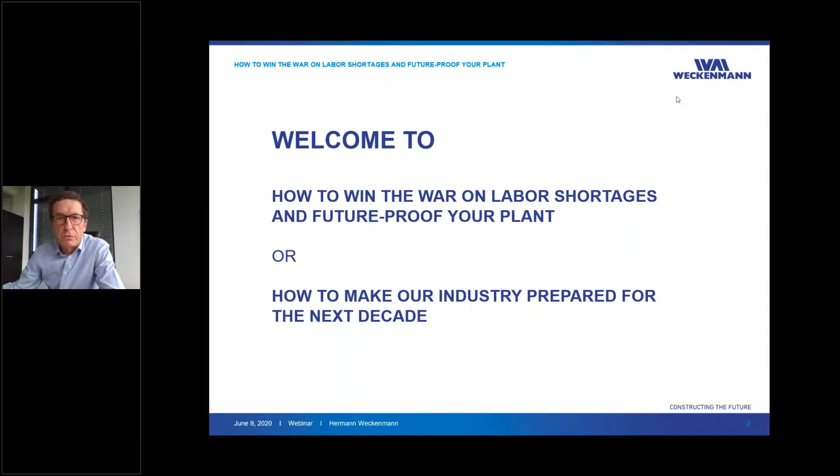Welcome to everybody to today's topic, how to win the war on labor shortages and future-proof your plant, or how to make our industry prepared for the next decade.

In this webinar, we will discuss the following topics: who is Weckenmann, today's challenges, the manufacturing labor shortage is still coming, two US precasters made the leap, stationary production, circulation line, outlook, and discussion.

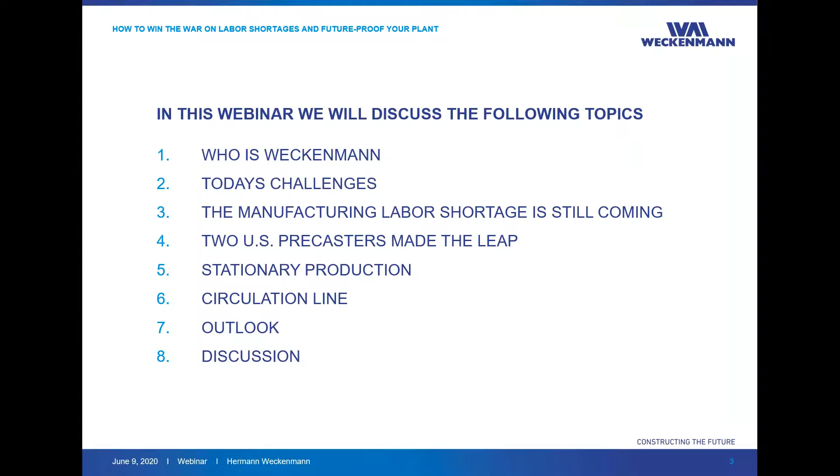Who is Weckenmann? First, some information about our company. Founded in 1957, we have about 150 employees. Our customers are worldwide. Our location is in the southwest of Germany, near Stuttgart, or for those who know that, the Black Forest. We are an international technology leader. We made some inventions, for example, the shuttering robot or concrete spreader, the automatic concrete spreader is invented by us.

We are thinking and acting globally, so we do have a lot of international customers, and the key to our success is a combination of high product quality and a focus on each country's specific requirements. Our machines and equipment is really long lasting, 20 years and more are they in use. And we have a high manufacturing standard in 2 production plants. To bring it in one sentence, Weckenmann is 100% dedicated to the precast concrete industry.

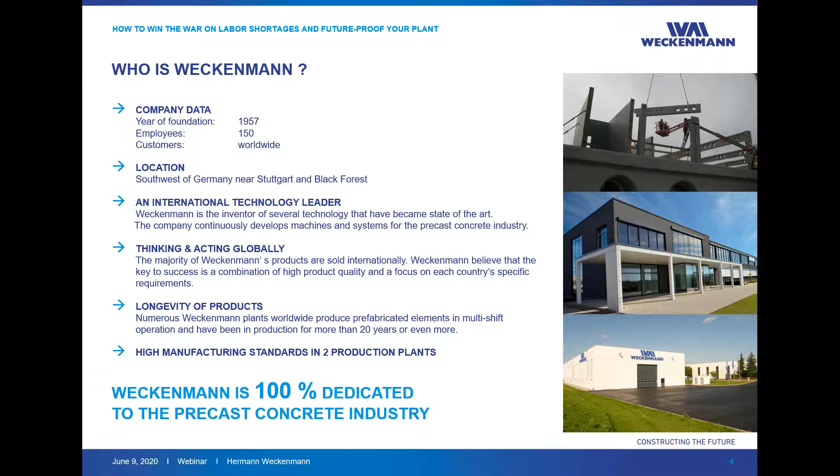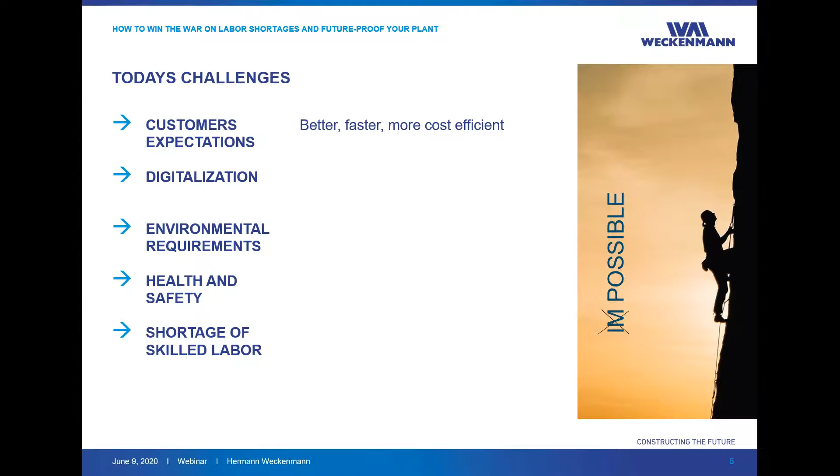Today's challenges. First, the customer expectations: better, faster, more cost efficient. We have to be better, faster, and more cost efficient to gain more market share. Digitalization is an advantage and a precondition for industrialized construction, and that's the future.

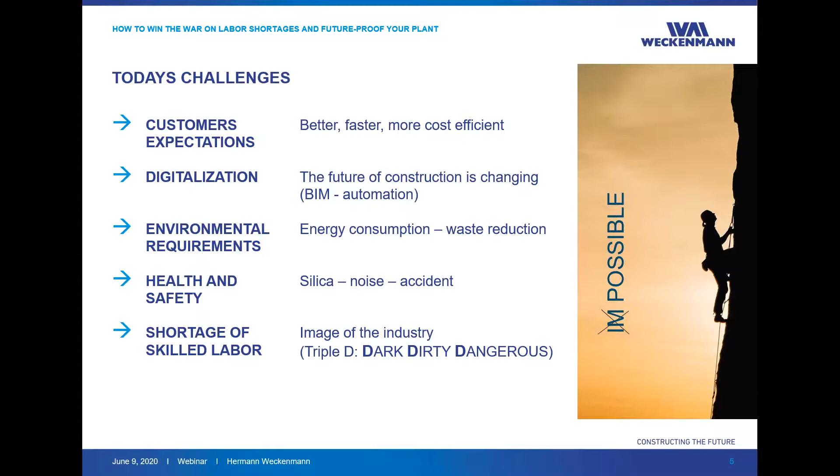The environmental requirements, energy consumption, waste reduction are some headlines. The reduction of the carbon dioxide footprint will be an important competitive advantage in the future for our industry. Health and safety, to keep our employees healthy and safe should be out of discussion. And the shortage of skilled labor, we have to overcome the not-the-best image of the industry. I heard once the description of a triple D: dark, dirty, and dangerous. The precast concrete industry has a big chance to make their jobs much more attractive, well paid, modern, and safe.

The manufacturing labor shortage is still coming. Stay prepared. Estimates put the manufacturing labor shortage at 2.4 million by 2028, according to Deloitte. We can't assume this gap will be solved by a sudden influx of employees after COVID-19 restrictions are eased. The number of retirees continues to increase as the working population ages, meaning there will still be a lack of sufficient qualified applicants to replace them. That's something we have to discuss today.

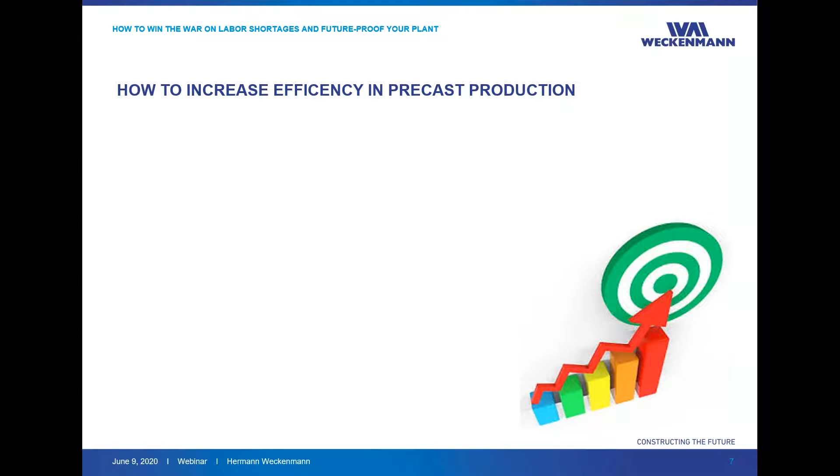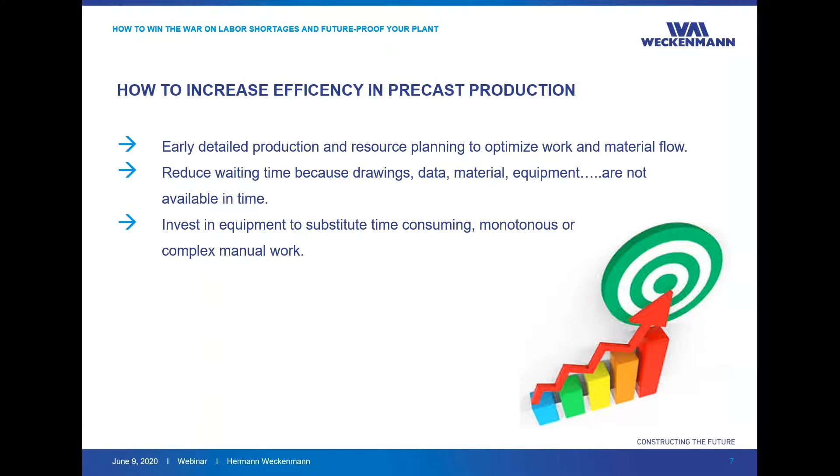How to increase efficiency in the precast concrete industry or in precast production. Early detailed production and resource planning to optimize work and material flow. Then we have reduced waiting time because drawings, data, material, equipment are not available in time, and this is a huge possibility really to improve the efficiency. And there's a chance to invest in equipment to substitute time-consuming, monotonous, or complex manual work.

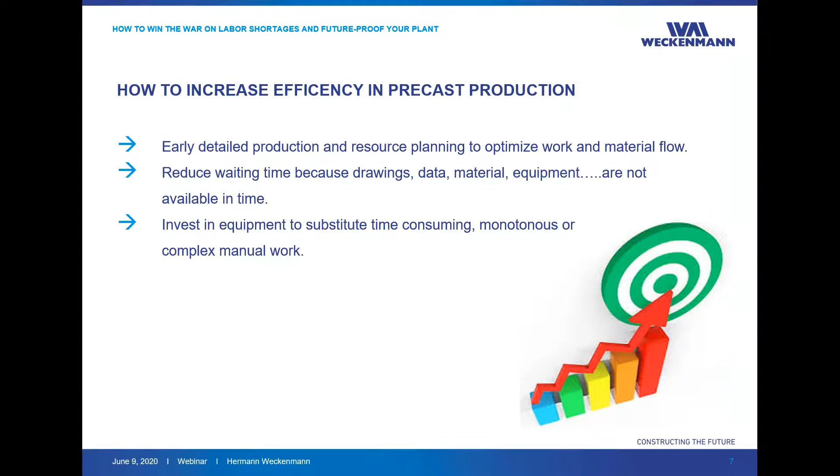Where are the greatest potentials to reduce manpower in precast production? First, we have the formwork.

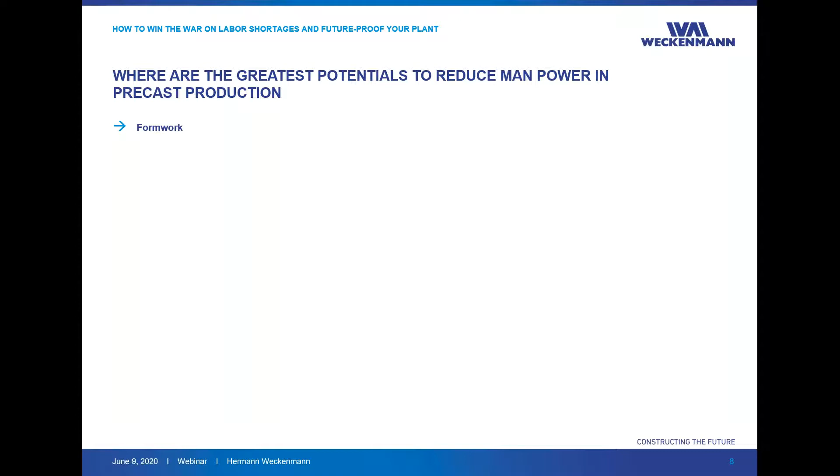Magnetic side rail, blockouts, and other standardized formwork helps a lot. Or do you still use a lot of wood and polystyrene to set up side rails and other formwork? Is the measuring tape your current technology? There are plotters, laser projection systems, and shuttering robots available to do that.

Cleaning and oiling the forms. Is a scraper or broom or compressed air your tool to clean the molds? Cleaning and oiling machines can really help to improve productivity.

Reinforcing. Rebar straightening machines, wire mesh welding plants, or rebar placing robots can help to reduce the manpower. Everybody can imagine how much time it needs to reinforce with rebars and standard wire mesh, not to mention the waste.

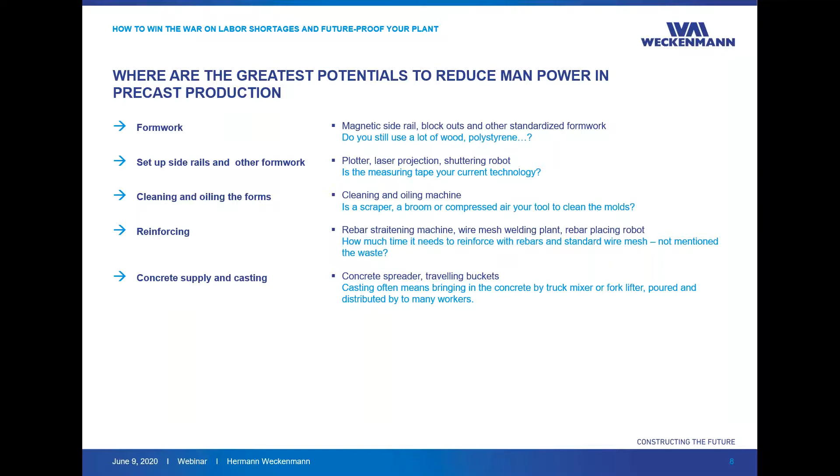Concrete supply and casting. There are concrete spreaders available or traveling buckets. And when we see what is in many factories, the normal way to bring in concrete is by truck mixer or forklifter, then poured and distributed by too many workers shoveling and bringing the concrete to the right place.

We have the surface treatment. Power troweling machines are available, or automatic washing machines and something like that. It's more safe to use such a machine, and it's faster and more productive than standing on the bed using a mobile troweling machine, which is really time consuming and dangerous.

Service and maintenance helps reduce manpower. Although you need manpower to do service and maintenance, if the machine has a simple and robust design, or remote access to the control system, or when you use predictive maintenance, the availability of the equipment gets really increased.

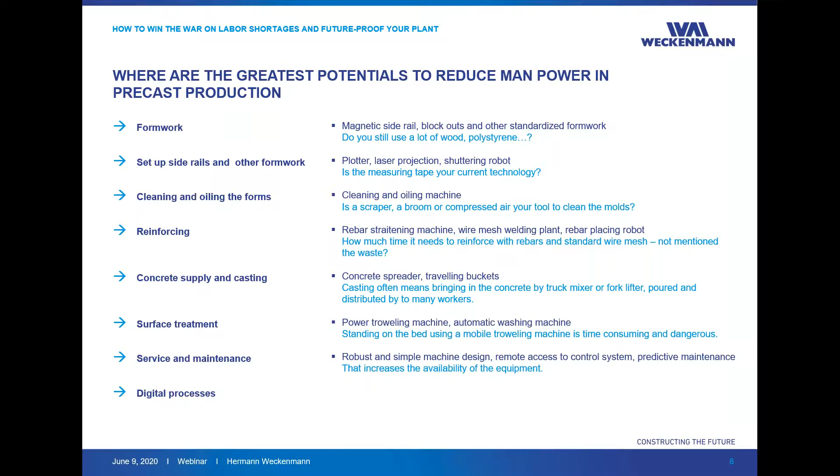And we have the digital processes. Hardware and software are available to digitalize all processes from design, procurement, manufacturing, transport to installation. And we should not see anymore, or that often, people running around with a bunch of papers, because that isn't really future proof.

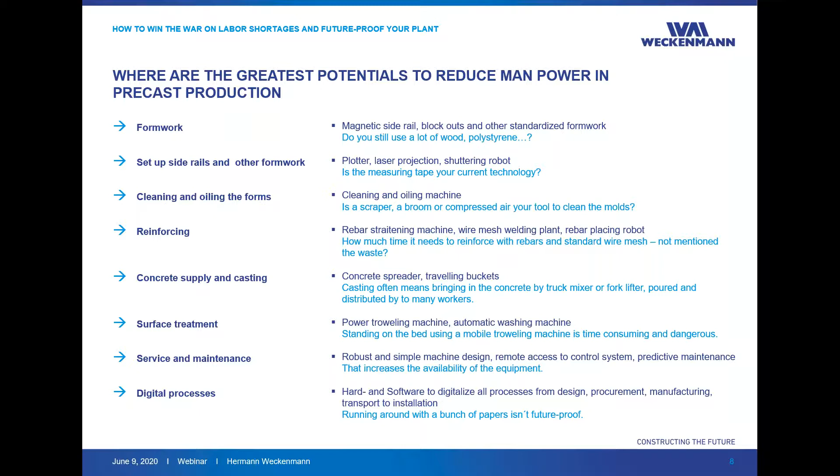Which production method is really the right way? Is it stationary production or is it circulation line? Is stationary production old style, or is the circulation technology the future? Let's talk about differences and advantages of those two systems.

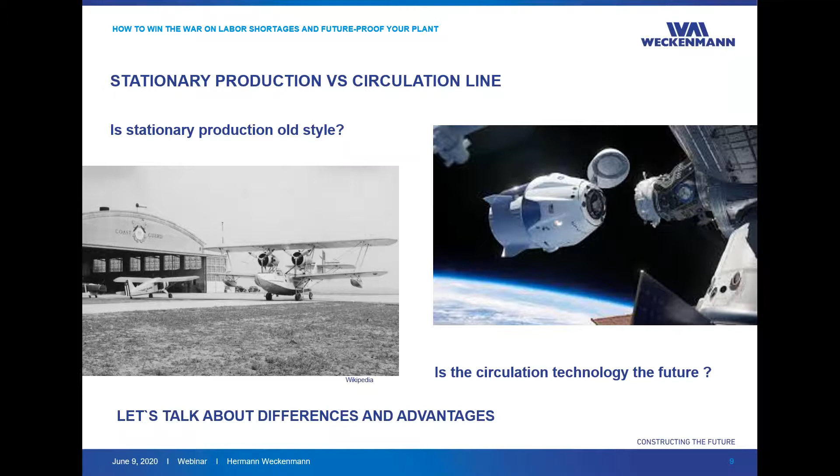First, we have the circulation line. The advantages are the following. First of all, the work comes to the worker. That means everybody stays at a certain station, less running around. You have dedicated working places. There are high automation opportunities.

Those circulation lines can really start with basic technology or basic equipment, but it's easy to upgrade, easier to upgrade than in a stationary line. We have good workplace conditions. For example, temperature and light can be controlled. Health and safety are more guaranteed, and material and tools are within reach.

We have targeted material flow. The way in and out for all material is clear. We have dedicated storage areas. It's energy efficient. For example, think about the curing chamber, which is an insulated environment where you have controlled temperature and humidity.

The circulation system allows better production control. For example, data about material consumption, working time, curing time, status of each job is available on time. And it is less space consuming, because in the curing chamber, the circulation technology uses the third dimension, as the pallets are stored one above the other.

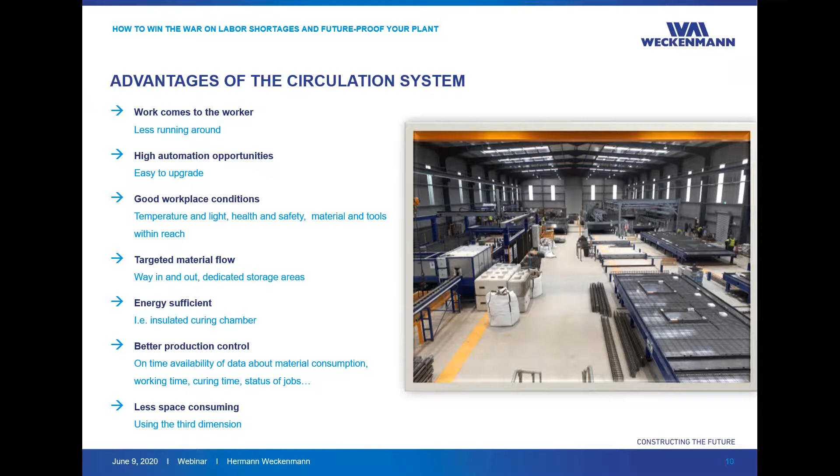Coming to the advantages of a stationary production line: long beds are more suitable for pre-stressed products. The flexibility for different products to be manufactured is higher, because several teams can work on different molds simultaneously. The investment is lower, which makes sense when the required capacity is smaller, because the circulation line needs a minimum production output per day to be cost efficient.

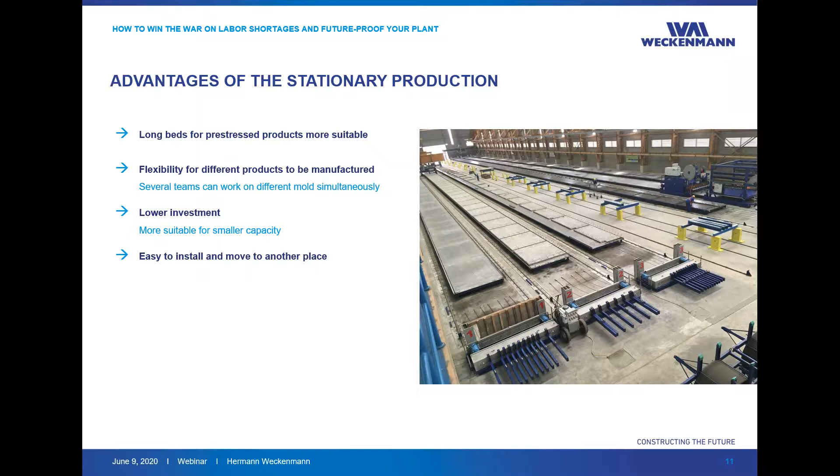And it is easy to install and easy to move to another place, just in case that's needed.

Why did two US precasters make the leap into higher investment in modernization, in automation? I will present two technologies: one is a stationary line and one is a circulation line. They made the leap because they want to be ahead in quality and productivity.

We started with a company, Kerkstra Precast in Trenton. They have a stationary production of double T's and architectural wall panels. Kerkstra was founded in 1962. They operate two factories, one in Grand Rapids, Michigan, and one in Trenton near Detroit, Michigan. Their product range goes from hollow core slabs, columns, beams, double T's to wall panels.

In their stationary production, at the plant in Trenton, they produce prestressed solid and insulated architectural wall panels and double T's. They have a double T bed 500 feet long, and 3 flat slab beds, 15 feet 4 inches wide.

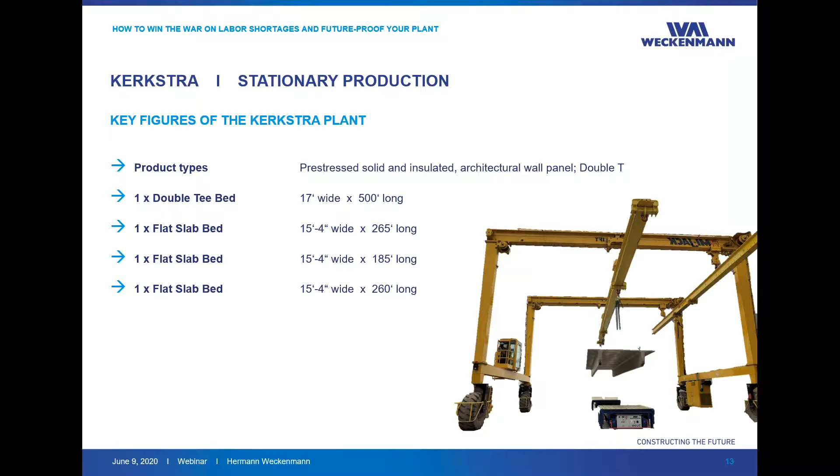Their stationary production investment was made in 2018 and 2019. They invested in a set of machines, in particular a so-called CPO machine, a finishing machine, a utility cart, top cart, and a runoff cart. I would like to show you these machines in action.

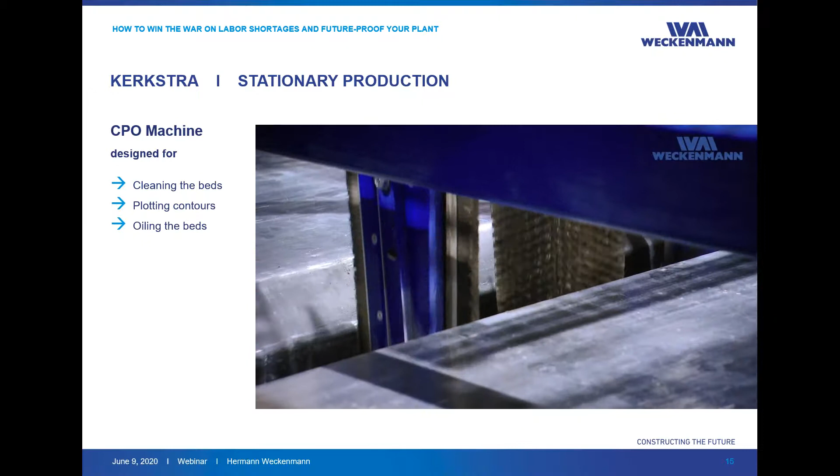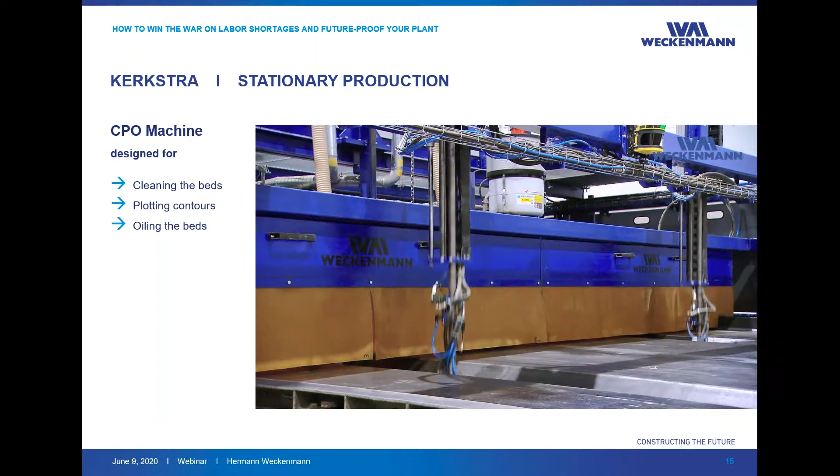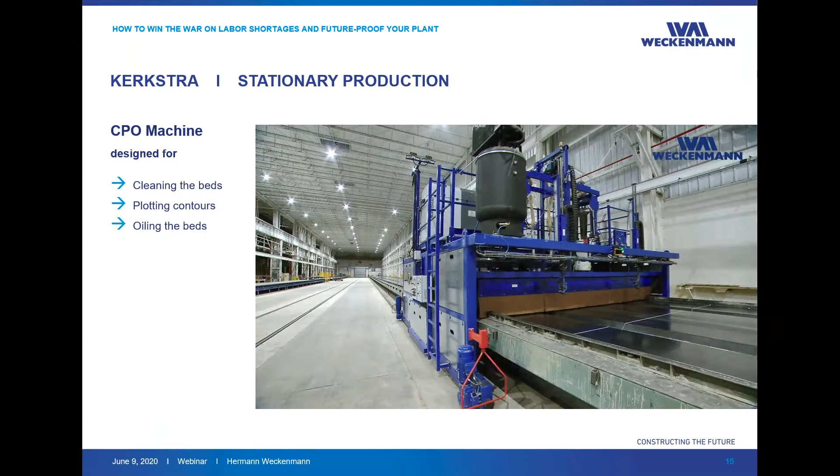First, start with the CPO machine. CPO stands for cleaning the beds, plotting the contours, and oiling the beds. That machine runs over the bed back and forth and executes all those processes automatically. Only the operator has to push a button at the beginning, and everything else happens fully automated. You can see very visible plotting lines showing where to place the bulkheads later on.

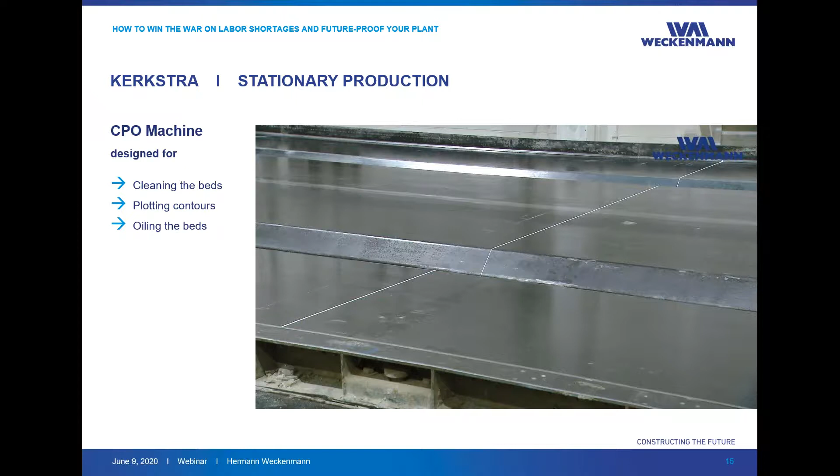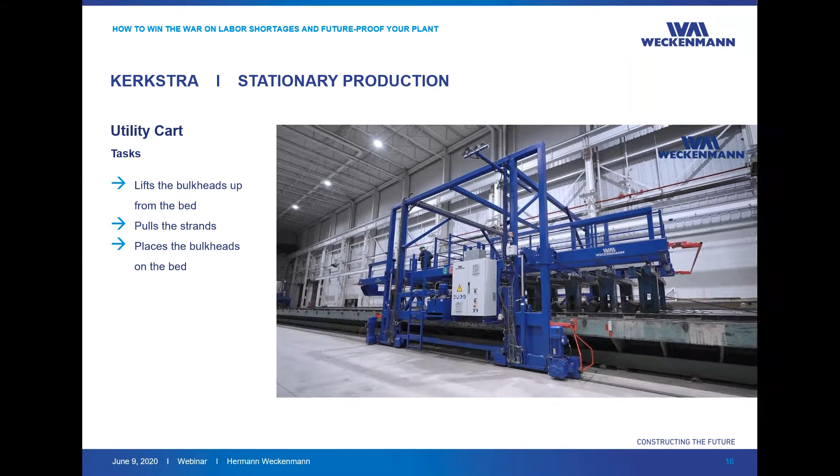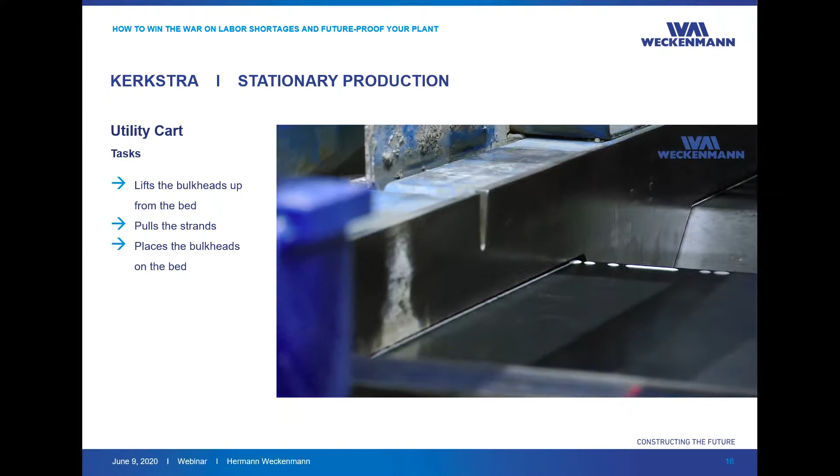Then we have the utility cart. Its task is to lift the bulkheads up from the bed after stripping the double T's, pull the strands, and place the bulkheads on the bed. It's operated by one operator who stands on the machine and travels with it all along the bed. The bulkheads are set up by the machine along the plotting line, so very precisely.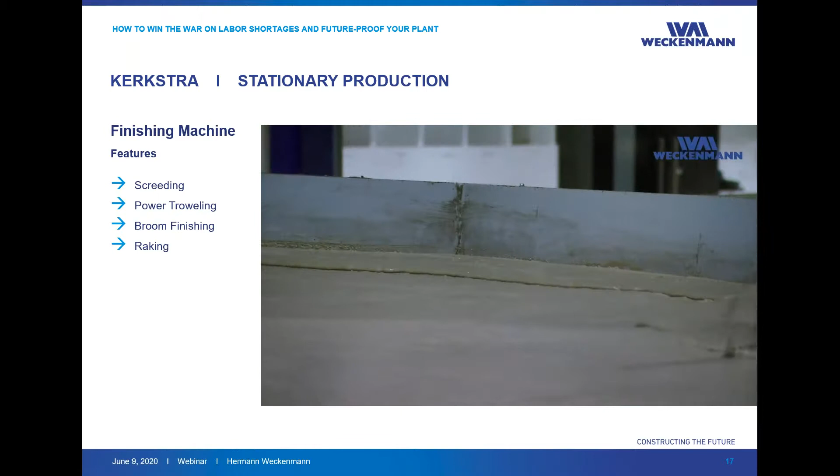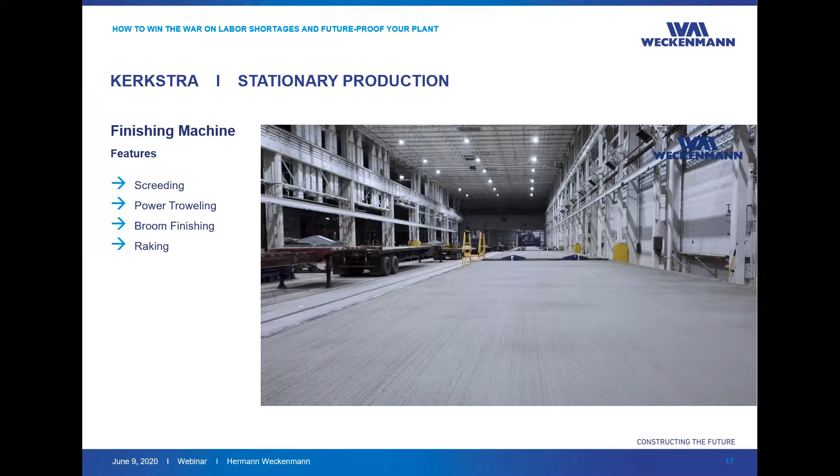Then we have the finishing machine. After casting the concrete, the finishing machine screeds the surface. It can do brooming, finishing, raking, and power troweling, depending on the requirement for the surface on the double T's.

Then we have the tarp cart. Two racks for the hoops are integrated, which allows quick and easy removing and installation of the hoops and the tarp.

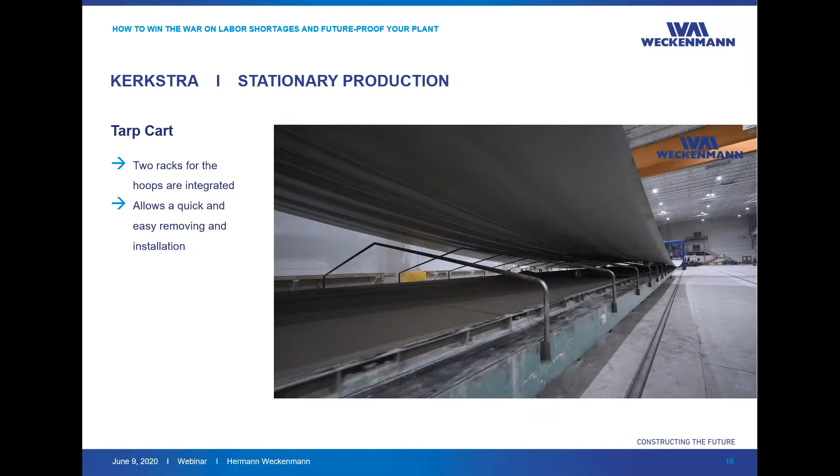The machine can move from one bed to the next, from the double T bed to the flat slab bed, by itself without a crane, just using rails on the floor.

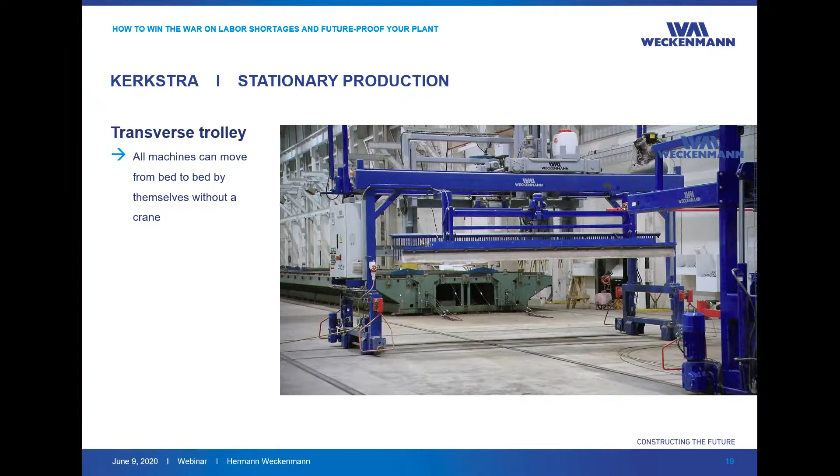Then we have the runoff cart for the transport of double T slabs or wall panels, using two identical carts which run on the same rail track. The carts are battery powered, and one operator controls the machines with a radio remote control system.

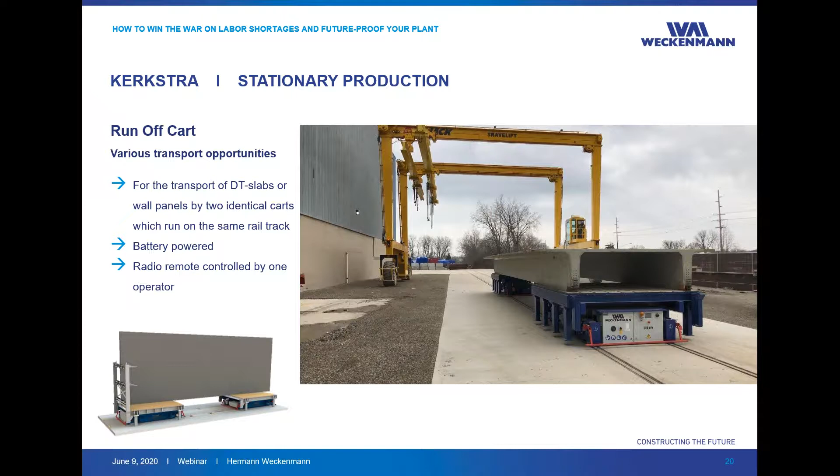What are the achievements after this investment by Kerkstra? We have increased productivity. Plotting, cleaning, and oiling are fully automatic, taking approximately 1 hour for a 500-foot-long bed. Strand pulling and setting up bulkheads needs 1 worker and also takes about 1 hour. Screeding and brooming needs 1 worker in less than 1 hour.

It depends on the surface type. Power troweling, of course, needs more time, but in general this is still a very short time to do, and just with one worker.

We have less silica in the air because the brushes and vacuum system integrated in the CPO machine reduce the dust. We also have reduced consumption of forming oil. The quantity of forming oil sprayed on is very even and can be adjusted exactly to the supplier's recommendation. The machine doesn't know a Monday or Friday, so it applies the oil the same amount every time, exactly what's needed and nothing more.

We have high dimensional accuracy with no measuring errors. The data is generated by the CAD system, and if that data is correct, all the plotting lines are correct as well. The plotter can plot whatever is in the file, so even numbers, figures, letters, or circles — there are no limitations.

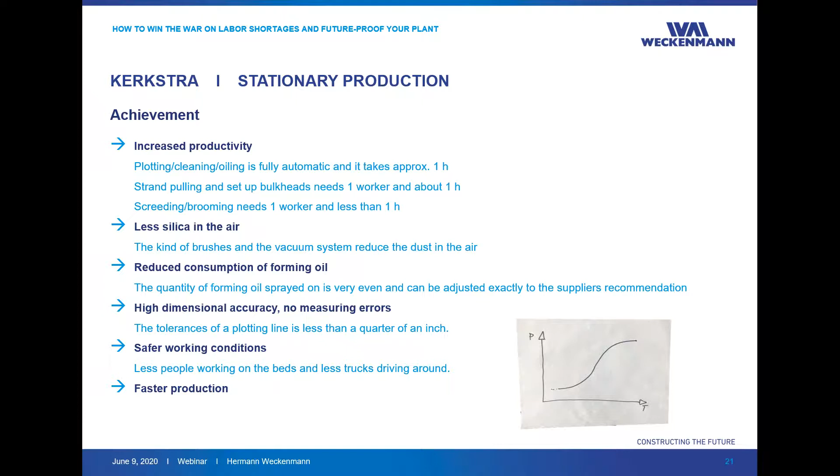We have safer working conditions because fewer people are working on the beds and fewer trucks are driving around. And overall, we have faster production.

We come to the next sample or project: Molin in Ramsey, Minnesota. They have a circulation line for architectural wall panels. Founded in 1897, Molin is a designer, manufacturer, and installer of precast pre-stressed concrete components. Headquartered in Lino Lakes, Minnesota, Molin also operates an automated wall panel production facility in Ramsey, Minnesota, which is what we're talking about now.

The product types there are solid and insulated architectural wall panels with many different surfaces or textures: fair-faced brick, water-washed, acid-etched, sandblasted, liner — almost no limitations. The pallet size is approximately 13 feet wide and 40 feet long. They have 24 pallets in their plant, and the maximum dimension of a precast concrete element is 12 by 39 by 12 inches.

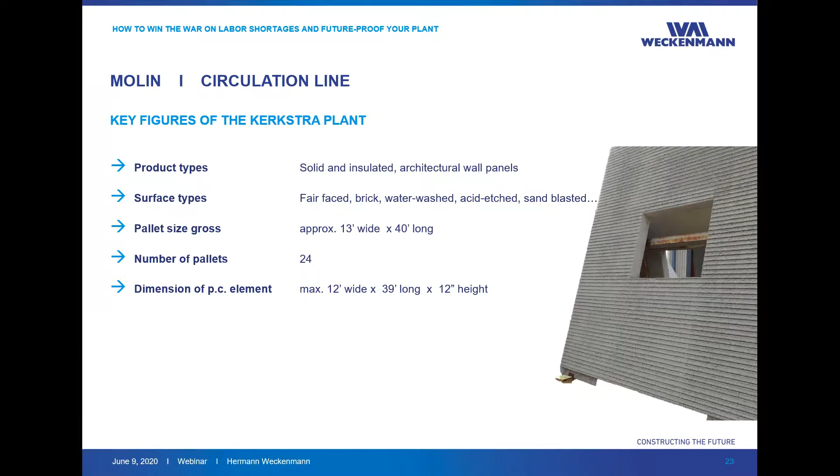In the following, the circulation line. The main components are, first, they have pallets and magnetic sidewalls, rollers and friction wheels, and cross-lifting trucks to move the pallets around in the factory, longitudinally and transversally.

And they have a heated queuing chamber, an insulated queuing chamber with an automatic rack operator. So bringing the pallets in and out of the queuing chamber is fully automatic. Also, they have a CPO machine. The functions are the same as with the Kerkstra. Then they have a sidewall cleaning and oiling line.

They have a concrete spreader with 2 interchangeable buckets for face mix and gray concrete. It's very important when they do colored concrete or different face mix, to avoid washing the bucket all the time after each batch of concrete. Then they have 2 compaction line stations. It's a shaking technology, very low noise shaking. It's a horizontal and low frequency system.

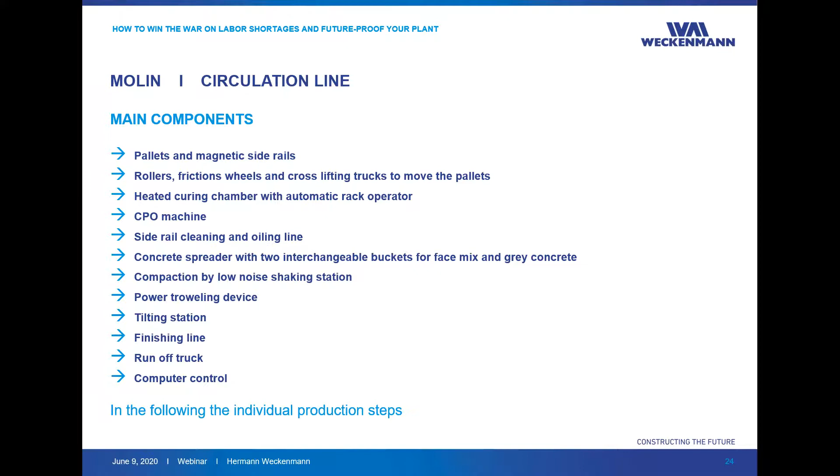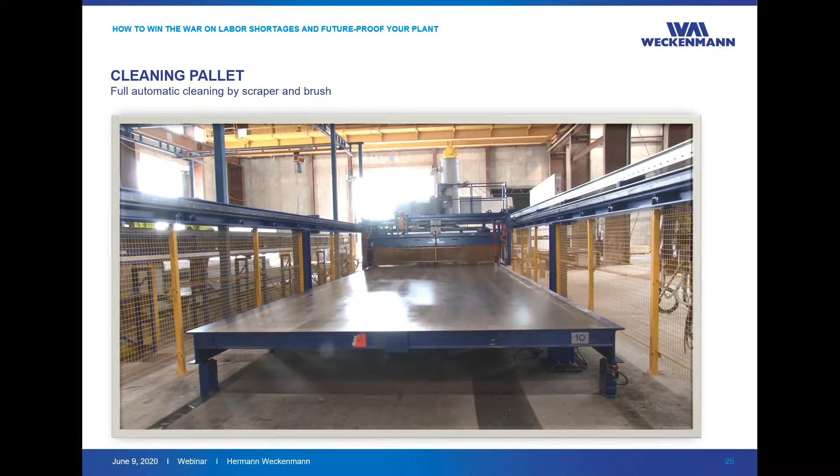Then they have a power troweling device. They have a tilting station, a finishing line, run-off truck, and everything is computer controlled. In the following, the individual production steps are also shown in videos. It starts with cleaning the pallet by the CPO machine. That machine is also fully automated. It goes over the pallet using a scraper and a brush.

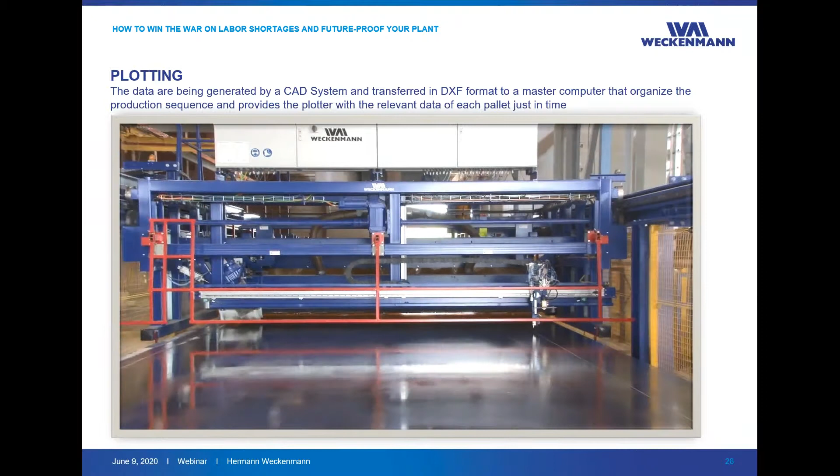Then plotting starts. The data are generated by a CAD system and transferred in DXF format to a master computer that organizes the production sequence and provides the plotter with the relevant data of each pallet, and that happens really just in time. And also here, there are no limitations on the information you want to bring onto the pallet. Then we have oiling. Forming oil is sprayed onto the pallet in a very even and consumption-controlled way.

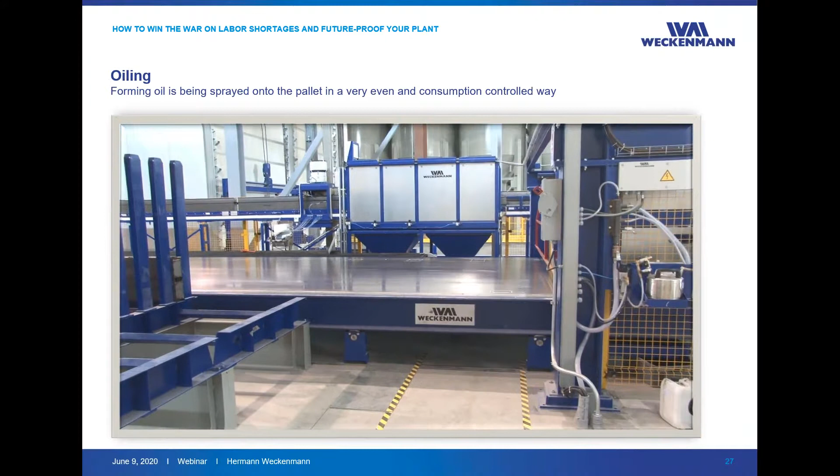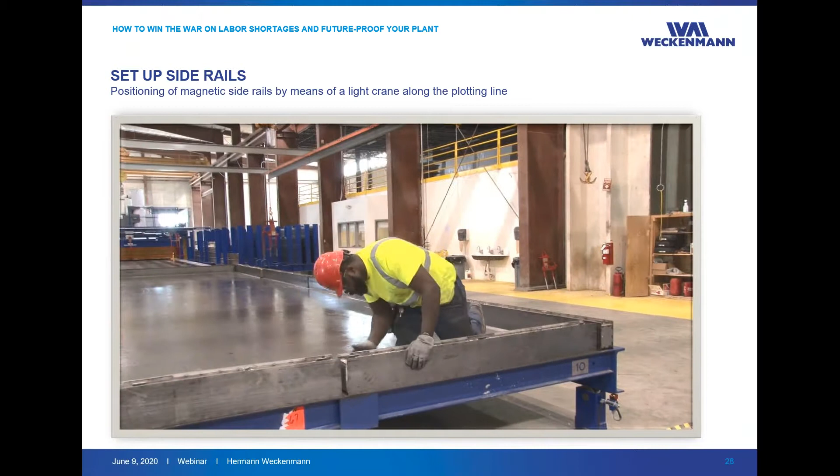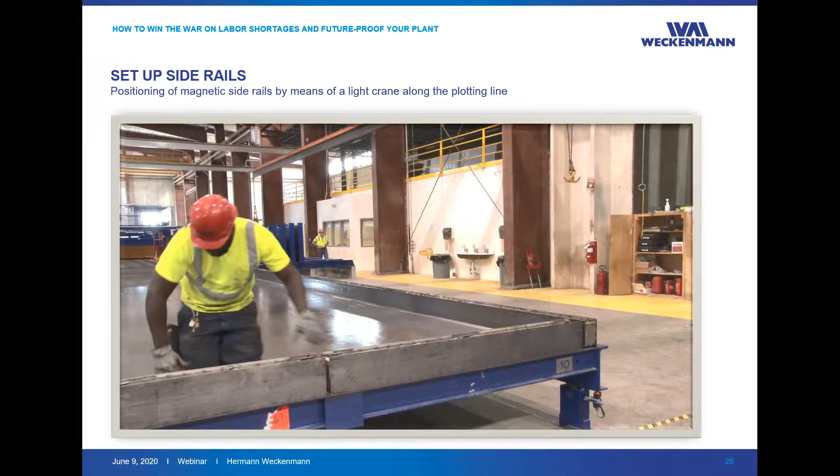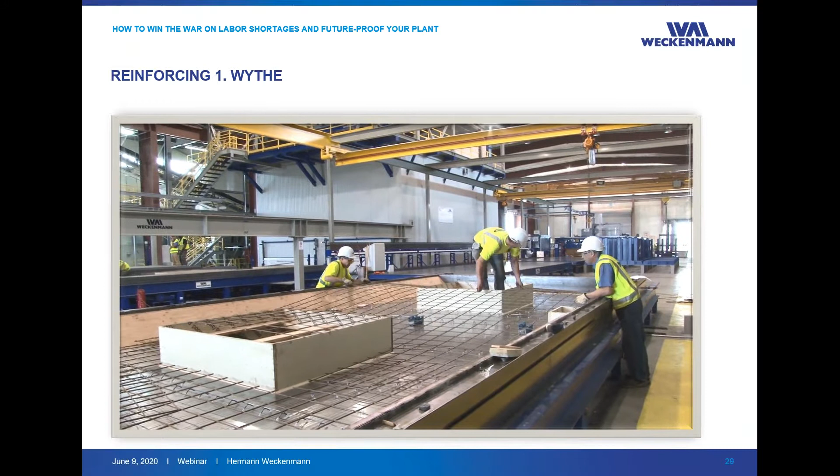Then we have the setup of the side rail. The positioning of the magnetic side rail is done by one operator by means of a very light crane, and he uses a plotting line to align or place the side rail. Then the pallet moves further to the next station where the reinforcing of the first wythe happens. And then the pallet goes into the casting station.

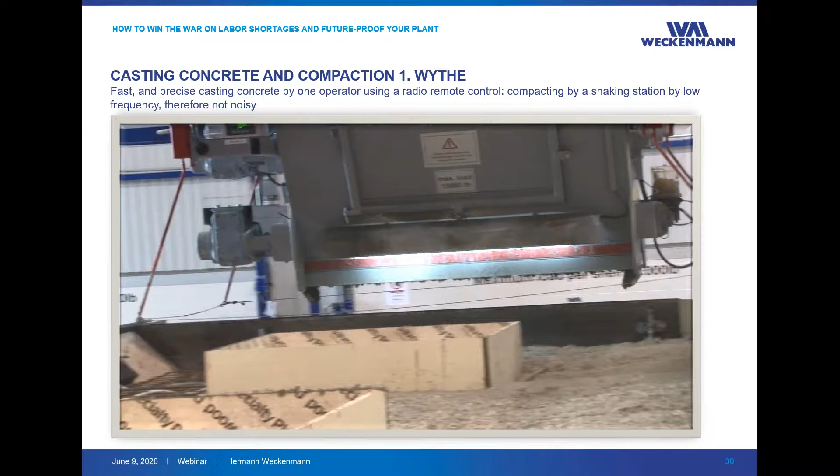So casting and compaction happen at this one station. It's fast, precise. It's done by one operator using a radio remote control. Compaction happens with a shaking station, low frequency, and therefore it's really not noisy. Very comfortable for the workers there. Then the pallet goes back to the station where the insulation is built in,

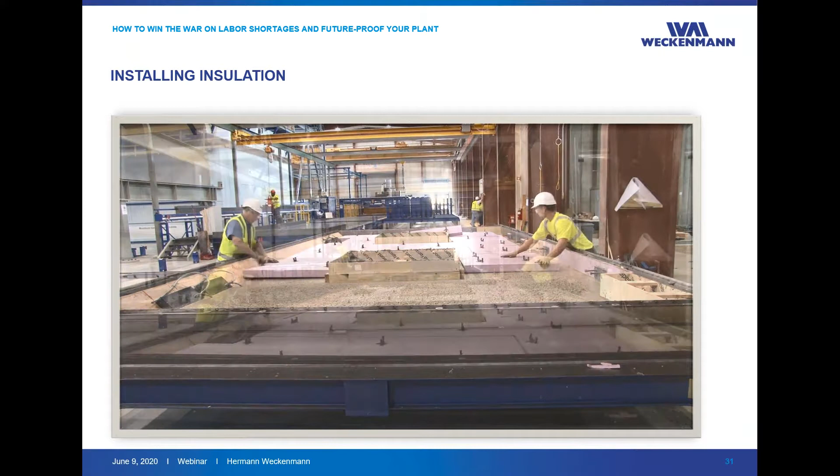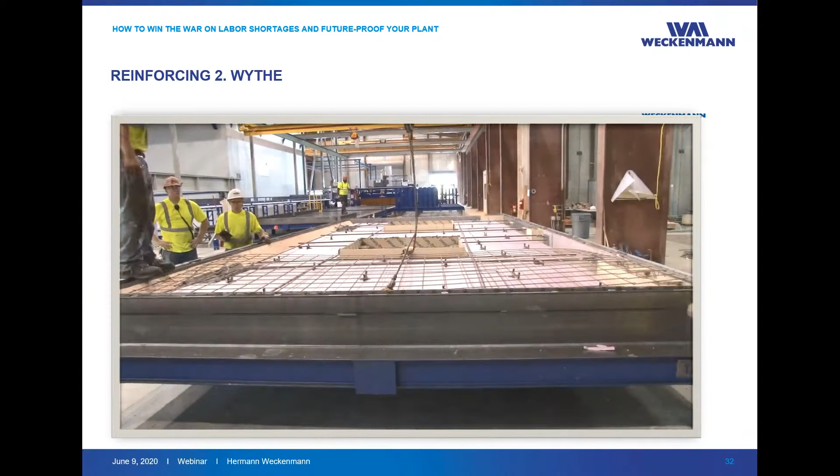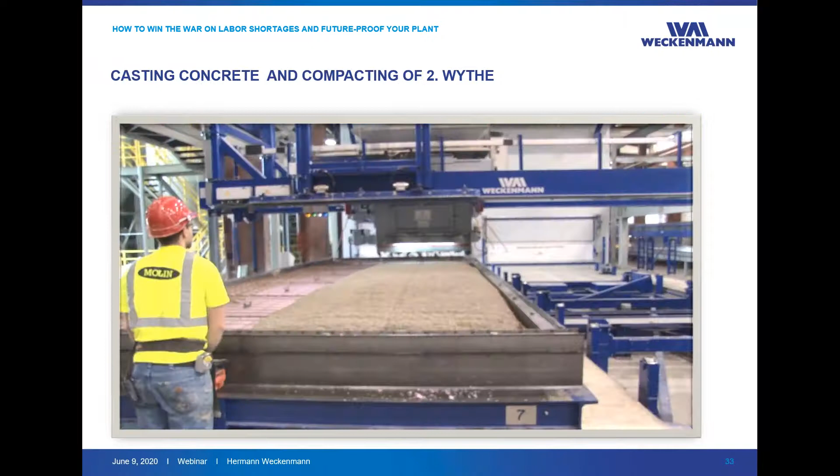and it's followed by reinforcing the second wythe. That happens on the same station. And the preparation of insulation and the reinforcing happens right next to that pallet, so very short transport distances. Then the casting of the second wythe happens, also the compaction. The concrete spreader is able to cast 1 cubic yard per minute. So that's really fast, and you can see the quality.

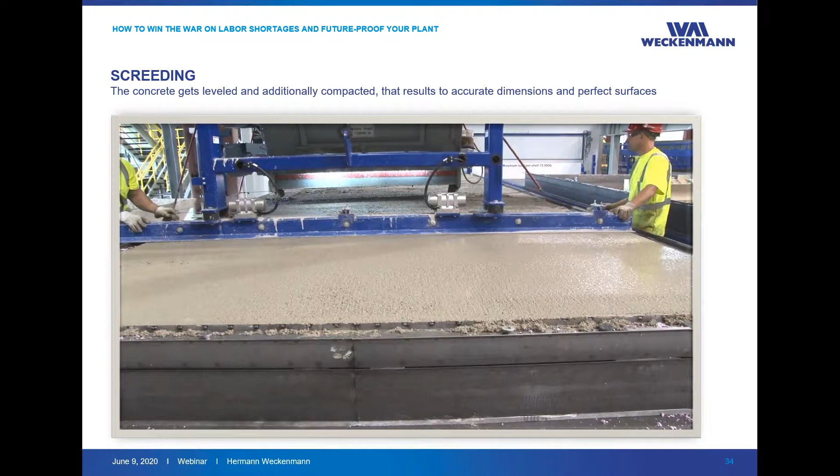The concrete comes out of the machine like a carpet, so very even, and there's almost no manual distribution of concrete necessary. Then we have screeding, so the concrete gets leveled and additionally compacted. That results in a really accurate dimension and perfect surface. Also, raking is possible with that to get this special texture.

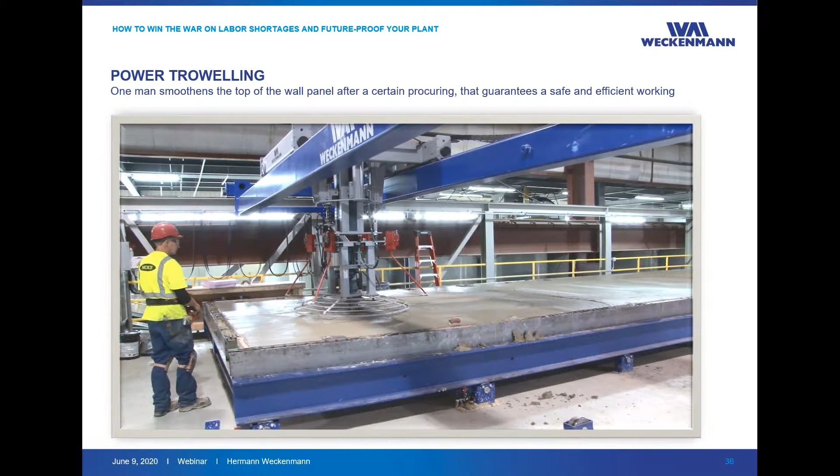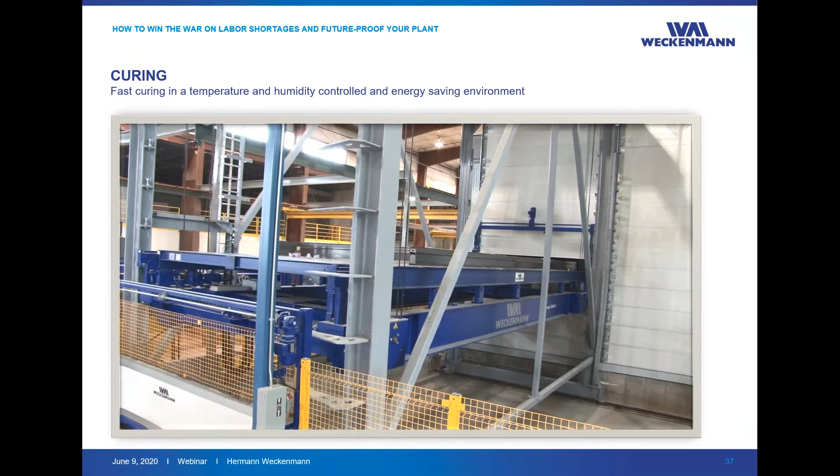And we have the power troweling. It also happens with one operator using a radio remote control. It can really get a very nice surface. Curing happens in the curing chamber. It's really fast curing because temperature and humidity are controlled, and therefore it's a very energy-saving environment.

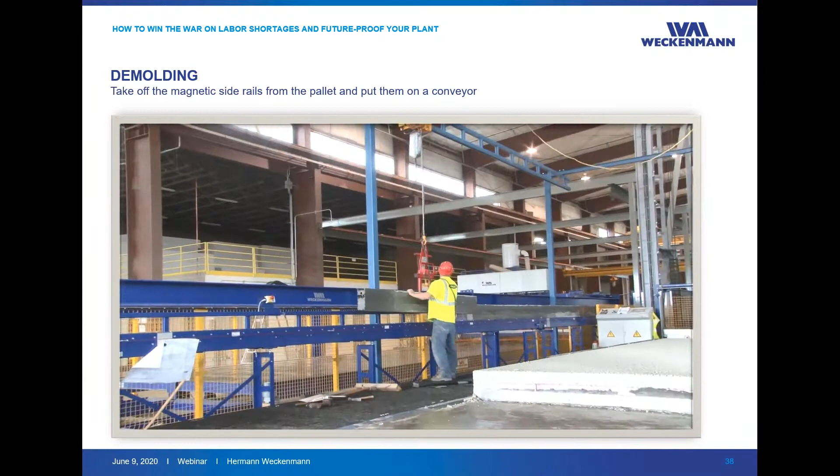Then the sidewalls get demolded, stripped, also using a light crane, and the operator puts them on a conveyor. The conveyor ends in a sidewall cleaning and oiling machine to guarantee that the sidewalls are kept clean all the time and always oiled, which is really important.

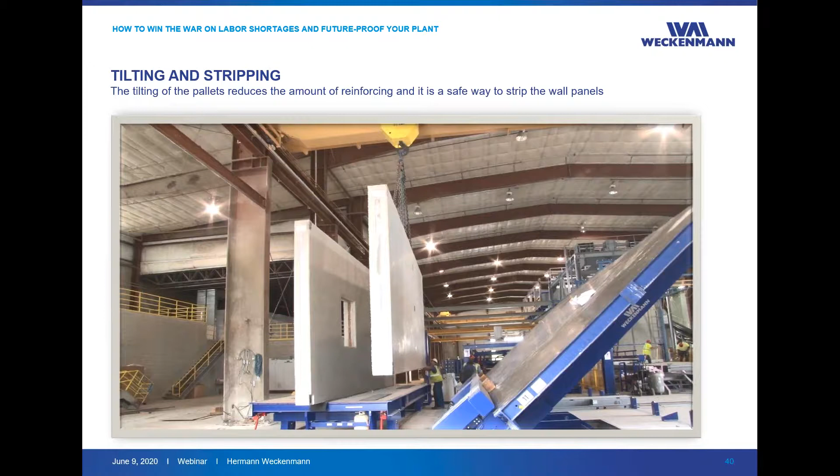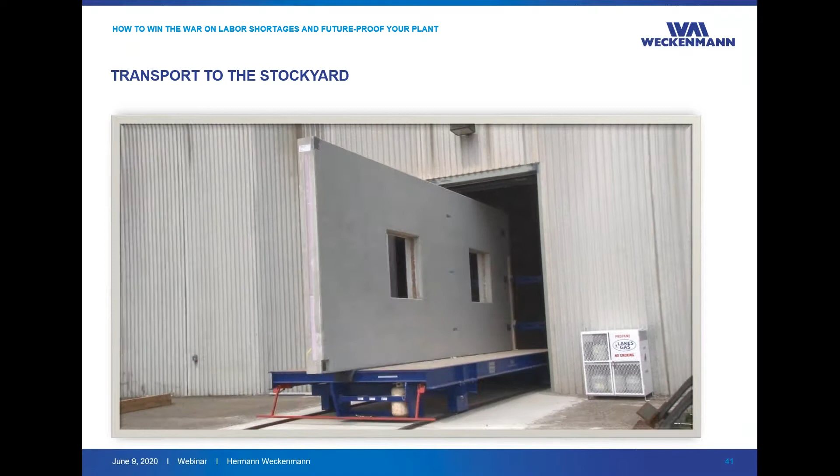And we have tilting and stripping. The tilting of the pallet reduces the amount of reinforcing, because the tilt-up is done differently than when you just tilt it up on a stationary bed, and it's also very safe to do that. And then the elements, the wall panels, are transported by a run-off truck to the stockyard, or they go into a finishing line.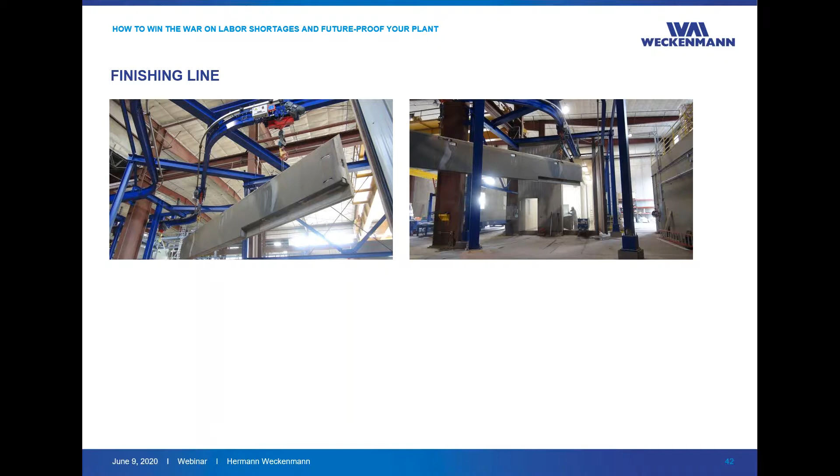It's an overhead conveyor, and the panels go from one bay to the next one. It's a curved conveyor, and the conveyor ends in a cabin where a special washing machine is installed. The washing machine can make different textures on the wall panel, and after that, the wall panel ends at the stockyard where the gantry crane takes over the wall panel and puts it in a rack or on the truck.

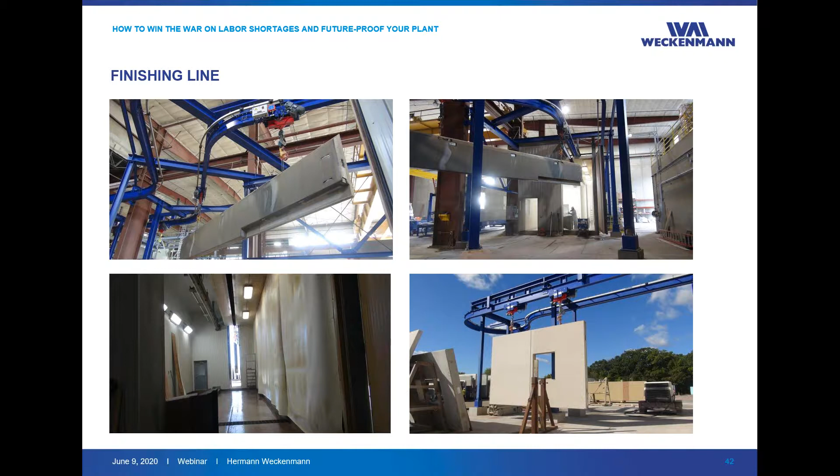The output and productivity of such a circulation line at Molin is about 2 pallets an hour. So that means they can get 5,000 square foot a day. But that really depends on the final product. If you have just solid wall panels, very simple, just gray concrete, no insulation, the productivity or the output could be even higher. But when you do architectural concrete, that's a bit different.

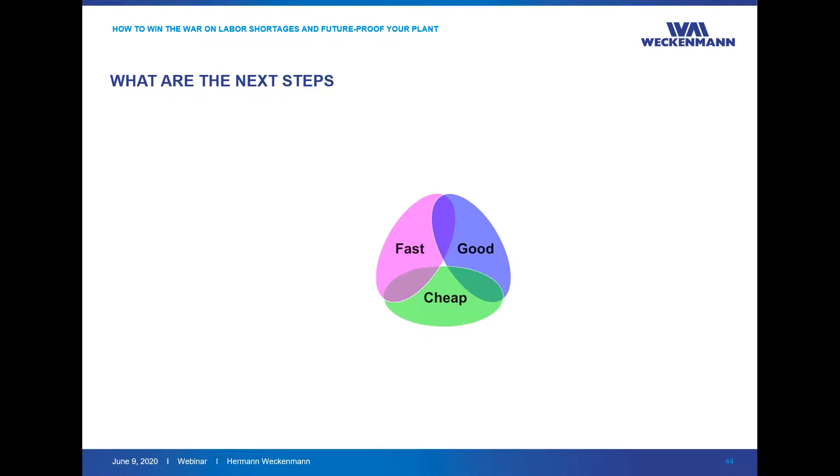Now, what are the next steps? The precast concrete producers can't afford to be behind other manufacturing industries. And automation solutions are already available and in use to achieve cost down, quality up, delivery time short, which is the triangle of success for all of us. And here are some samples of how the future could look.

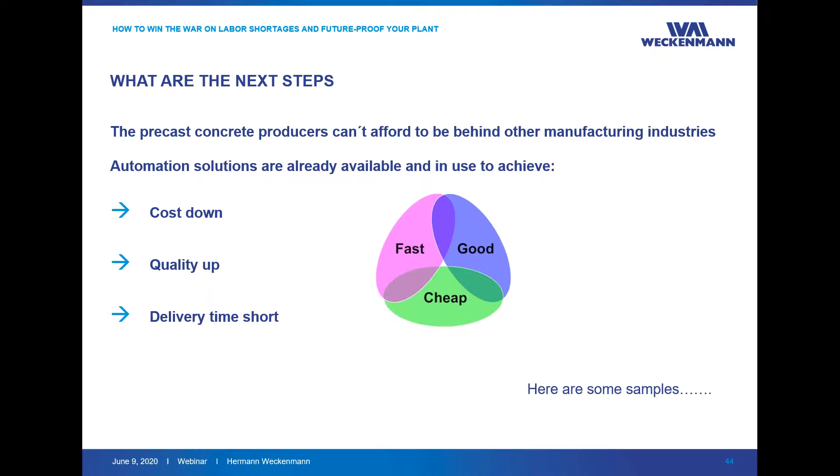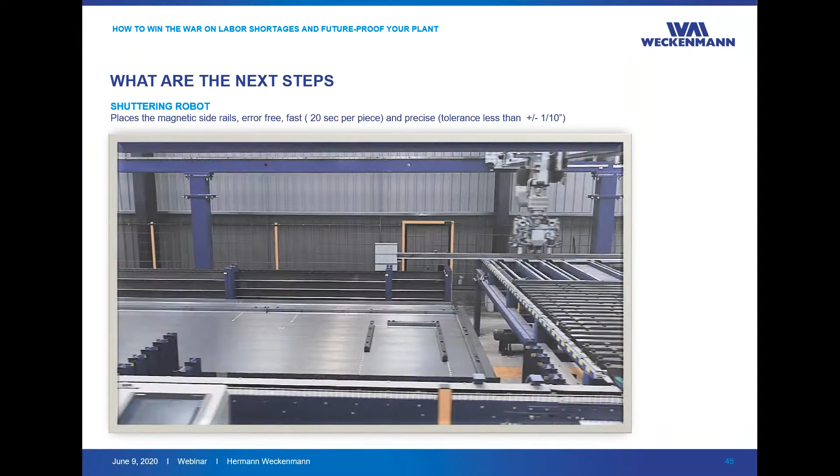What are the next steps? For example, using a shuttering robot. The shuttering robot places magnetic side forms error-free, in a time of 20 seconds per piece, and really precise. We have a tolerance of less than 1/10 of an inch.

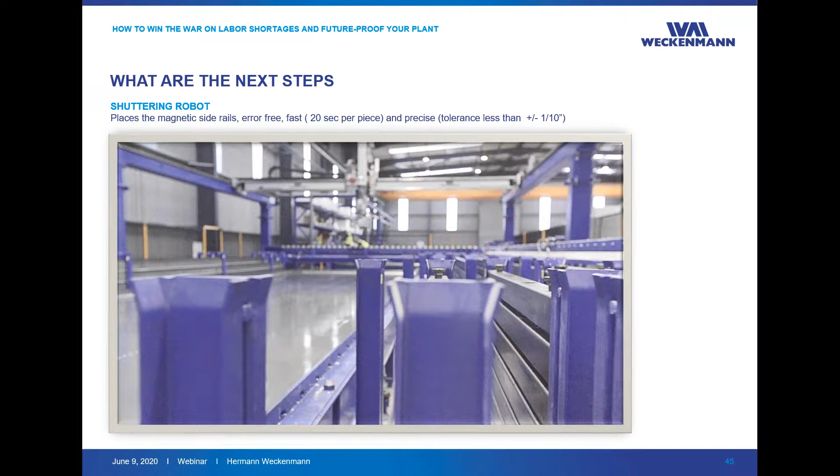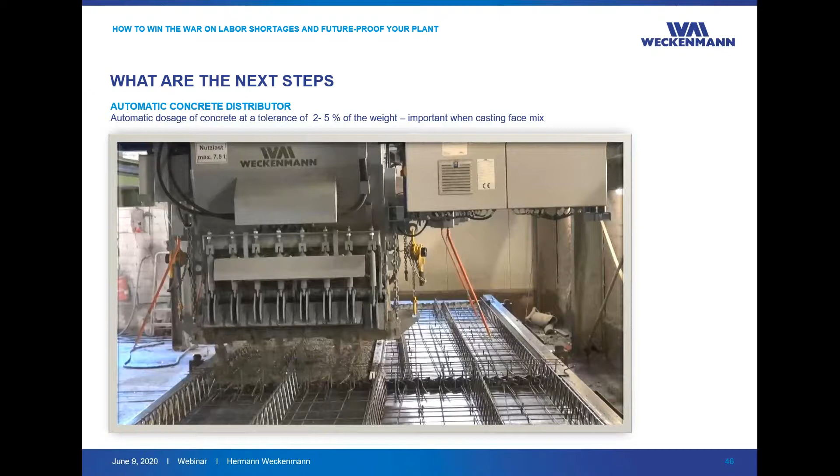Or using an automatic concrete distributor. Automatic dosage of concrete at a tolerance of 2 to 5% of the weight. This is very important when you're casting expensive face mix, where the consumption of concrete really is a costly question, and that really can reduce the amount of concrete for architectural wall panels.

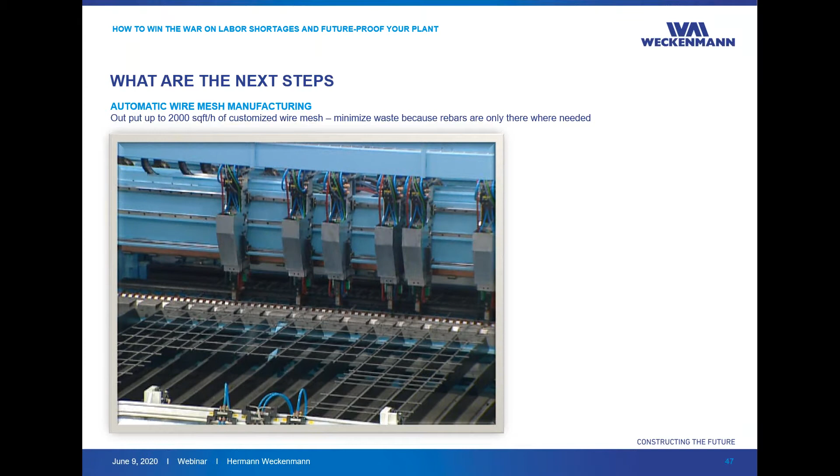Or automatic wire mesh manufacturing to weld customized wire mesh up to 2,000 square feet an hour. That really minimizes waste because rebars are only there where needed. For example, here you can see a different grid of rebars in the block out for a window, and this is also a fully automatic technology.

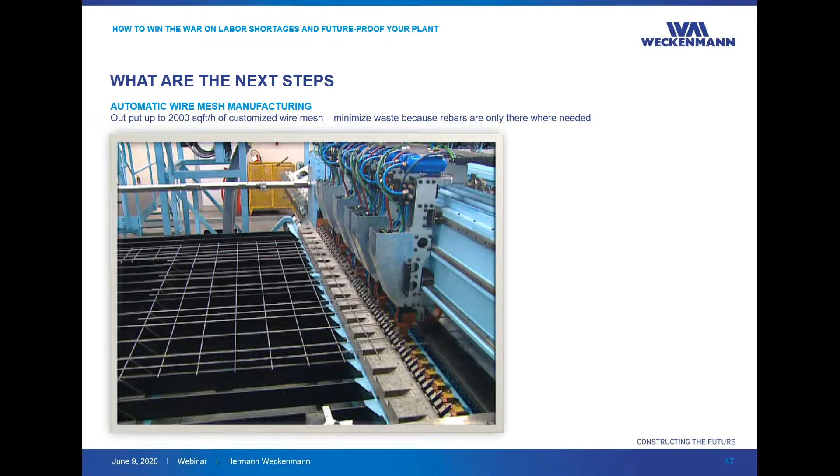In general, CAD/CAM technology, digitalization. We have a system of CAD/CAM. Most of you have a CAD system in place, but what about automation and what happens with that data? We have an environment around the machine as a link between the CAD system and the automated machines, because all those machines need data, and the CAD system generates data of the building.

Then that data must be panelized, and all those panels get into a production planning system where you do the daily production schedule. You determine the order of production, which panel has to be produced when. And having all those in a sequence, you allocate the panels on a pallet or another form. It depends on the size of a pallet: is there only one panel on a pallet, or 2 or 3?

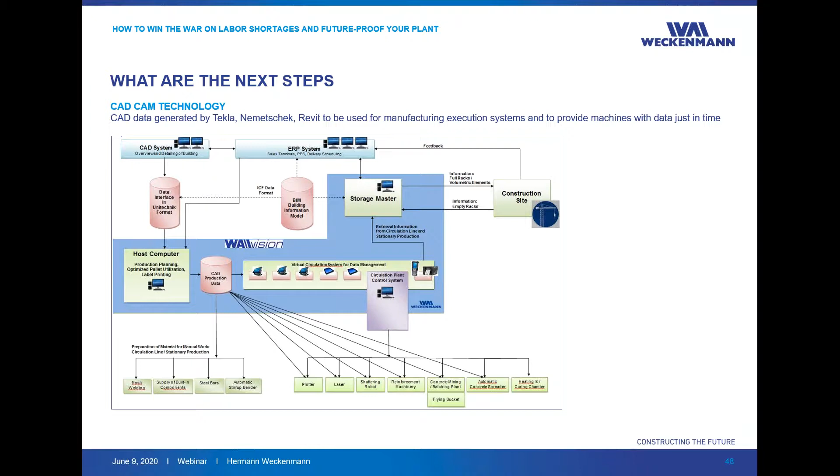So we have different data qualities and quantities for the different machines, and the distribution of that data happens with a host computer, which is everything shown in blue. And here you can see an idea of how to use such a computer, not only for machines but also for the workers.

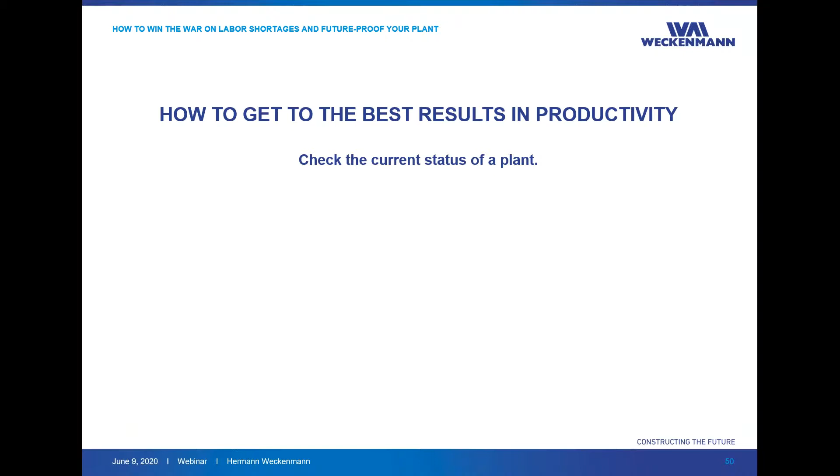Yeah, how to get the best results in production or in productivity? Because the question is, which methods, which actions, which machines, which technology is suitable for your individual plant or factory? First, we have to check the current status of your plant or of a plant. Where are the bottlenecks? By time and process analysis. So that needs some time, to identify where really the bottlenecks are.

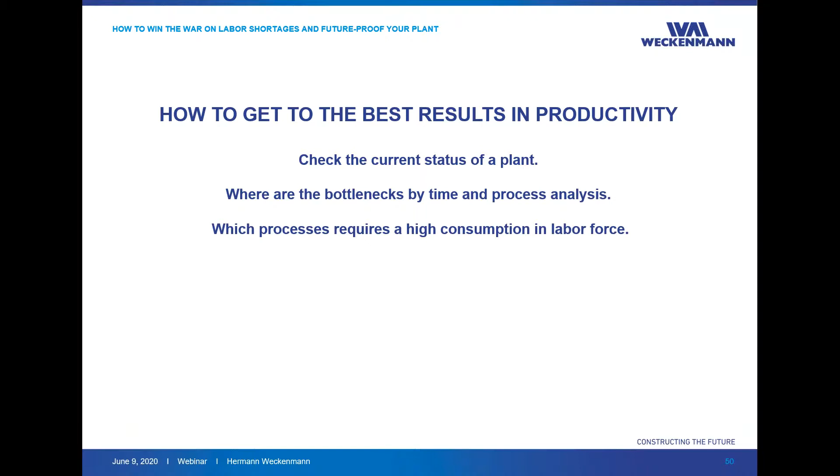In the circulation line, it's like when you have one truck on the road and many Porsches behind. So the Porsche is only as fast as the truck, and we have to identify where those trucks are. Which processes require a high consumption of labor force? Sometimes it's not a constant consumption, but periodical consumption. Sometimes you can see that when you cast concrete, there are 6, 7, 8 people casting concrete at the same time. But that only happens an hour a day, or less. So what happens? What can they do in the rest of the day?

Then to optimize the data, the material, and the workflow. As I said, the easiest achievement, the higher productivity, is to reduce waiting time. Then replacing manual work by machines, equipment, workplace systems, or other technology. And which kind of technology, machines or equipment is suitable for you? That's based on the analysis and according to where the bottlenecks are.

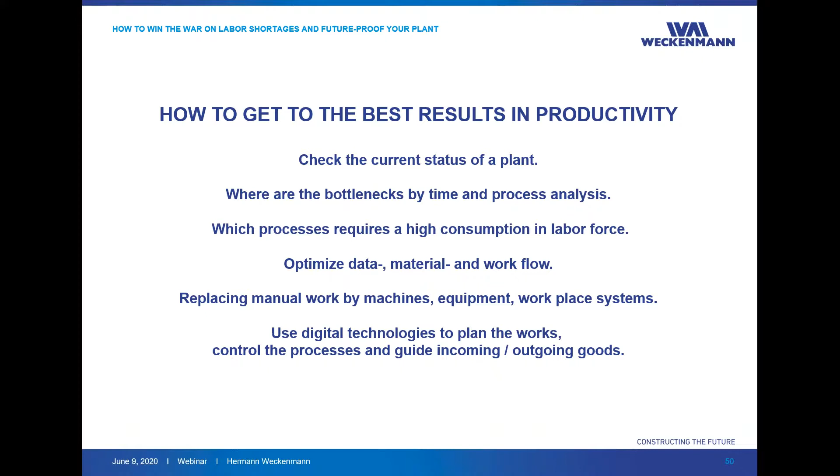And last but not least, use digital technologies to plan the works, control the processes, and guide incoming and outgoing goods. So using, for example, this CAD/CAM technology really helps to achieve a higher productivity in this area. And what can we do? Weckenmann and Afinitas can assist you in making your factory future-proof. And here is one testimonial.

I really like how Weckenmann understands the U.S. We could understand where Europe is different than the U.S. How we do things here is different. And Weckenmann understood that. They did not force Kerkstra to adapt to a European model, but they listened and they understood how we manufactured, what our goals were, and it just helped us achieve those goals.